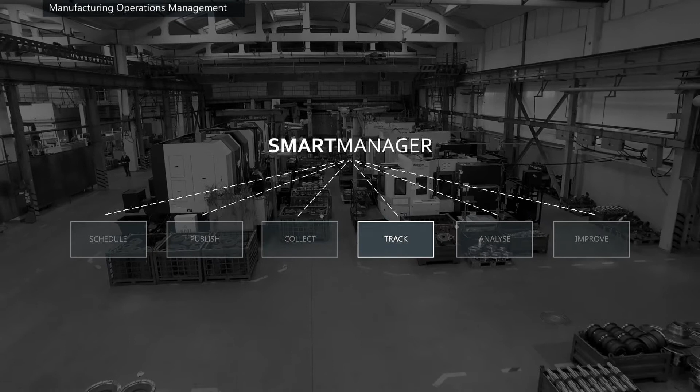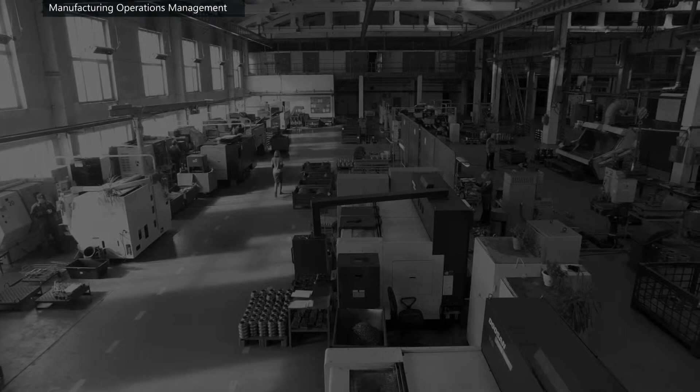Using latest technologies, the solution can effectively schedule, publish, collect, track, analyze, and help to improve human and machine execution of orders on the shop floor, resulting in faster delivery and lower production costs. In this video, we will show you how Smart Manager helps you measure your performance, increase your productivity, optimize your

operations, connect your machines, to revolutionize your factory. Measure performance, benchmarking human and machine performance to drive to world-class standards of operation within your organization.

Smart Manager provides key performance indicators, metrics, and the means of measurement to help you identify and drive loss out of your business, making you more competitive and more profitable.

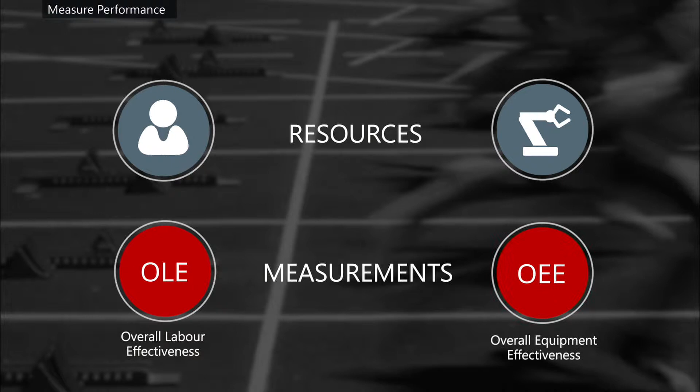As a manufacturer, you have two types of resources, people and machines. You pay a lot of money to have both of them, so you should monitor how well they're performing for you. For your employees, you need to measure their overall labor effectiveness. For your equipment, you need to measure the overall equipment effectiveness. These KPIs are supported by three metrics: availability, performance, and quality.

Let's take a look at a typical day for one of your employees. The day starts at 7 AM, they clock in and then grab a coffee. They make their way to a machine and start their first job. After a couple of productive hours of work, they stop for a break. They return from break and go back to the job they were running.

Then they stop for their lunch. In the afternoon, there is more of the same stop-start activities until ultimately they clock off. You need to be able to track all this activity to understand why they are not 100% productive for 100% of the time. This is known as their availability.

Then, you need to understand why they did not produce as many units as you thought they would during the time when they were productive. This is known as their performance. Finally, you need to keep a track on the quality of what they produce. These three measurements allow you to establish their labor effectiveness.

Now apply the same principles for all your employees and you begin to understand your overall labor effectiveness, or OLE. The average measurement of OLE in a manufacturing plant is only 40%. To be considered world-class, this should be 75% or above.

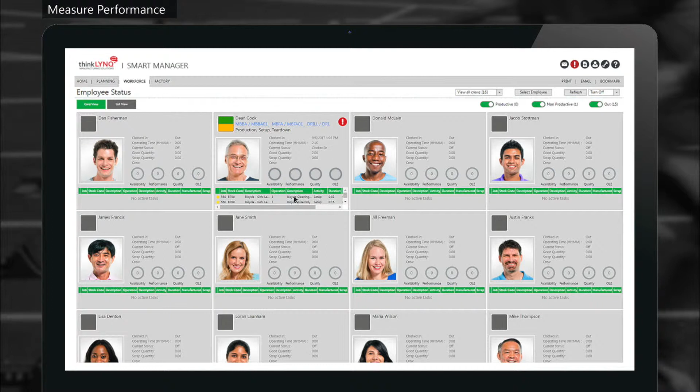Smart Manager supports the measurement and calculation of overall labor effectiveness. Data is captured using the workbench. Using the data captured, you are able to view the current status of all your employees, any issues they are having, and the jobs they are working on.

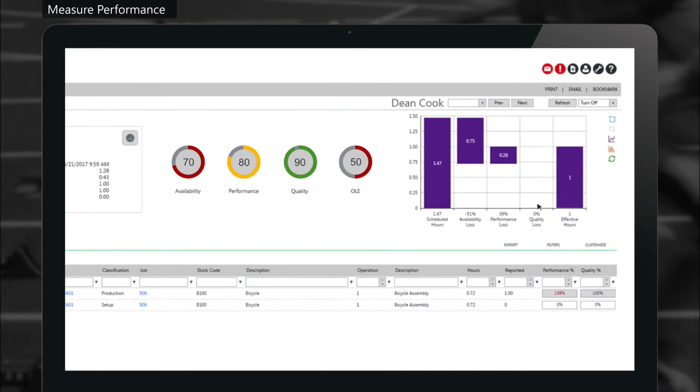Data is analysed in real time to provide availability, performance and quality metrics for each employee. Data captured for each employee is then aggregated to provide you with the overall labour effectiveness for your factory.

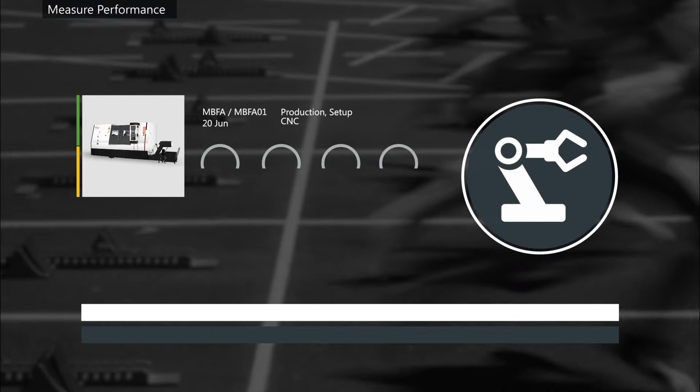Now let's take a look at a typical day for one of your machines. The machine is started at 7 AM, taking a few minutes to warm up before it can be set up for the first job. As the machine is not producing anything during this time, it is classed as non-productive, or downtime. The first job is run and produces a quantity, but some of the units produced have to be scrapped.

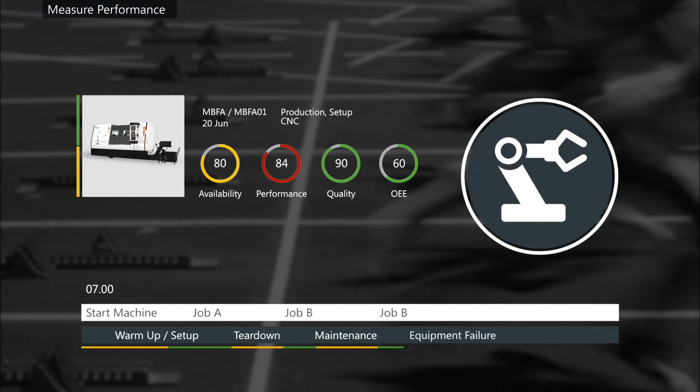When the job is finished, the machines need to be cleaned in preparation for a different job. The next job starts and then the engineer shows up to service the machine. During the rest of the day, there is more of the same stop-start activities, until ultimately the machine is switched off. Machines are the same as your employees, except probably a lot more expensive.

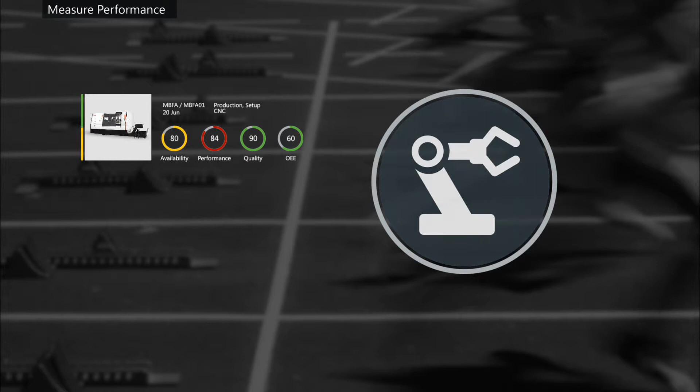You need to be able to track all this activity to understand why this costly asset was not 100% productive for 100% of the time. That's availability. You need to understand why it did not produce as many units as you thought during the time when it was productive. That's performance.

Finally, you need to keep a track of the quality of what is produced. By knowing all this, you can calculate its equipment effectiveness. Applying the same principles to all your equipment gives you visibility of your overall equipment effectiveness, or OEE. The average measurement of OEE in a manufacturing plant is only 60%. Today's world-class manufacturers operate at 85%.

Smart Manager supports the measurement and calculation of overall equipment effectiveness. Data is captured using the workbench.

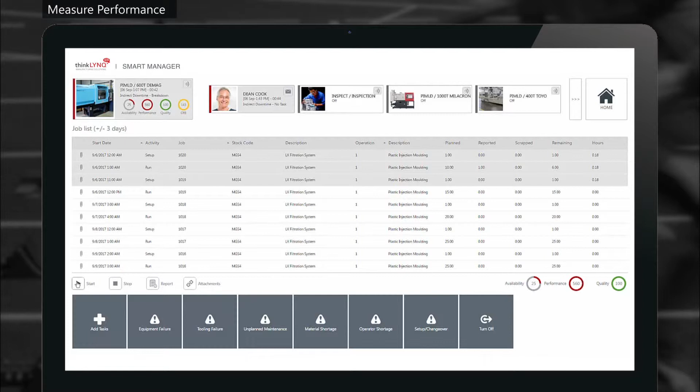There are two ways of capturing machine data. One way is for one of your employees to enter the time it was warming up, in setup, running, being cleaned, etc., and how many parts it produced, both good and bad, during this time. The other way is to automatically retrieve this data from the machine. We'll be talking about this more later in the video.

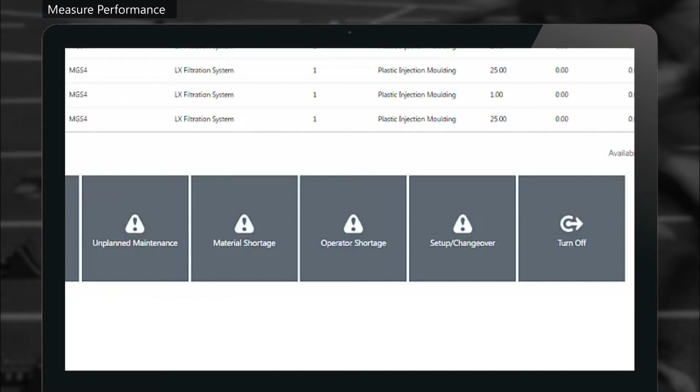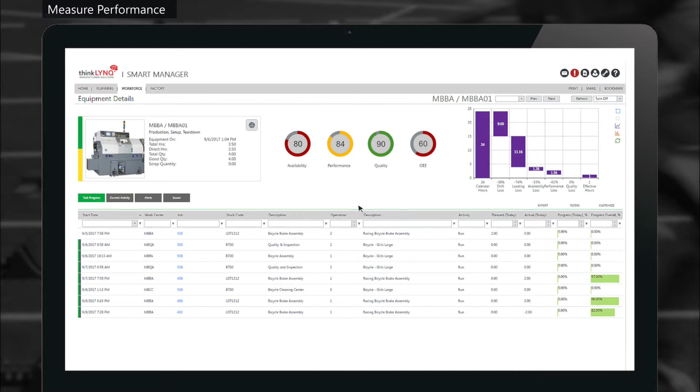Using the data captured, you can view the current status of all your equipment, any issues that have occurred, and the jobs they are running. Data is analysed in real time to provide availability, performance, and quality metrics for each machine or device. Data captured for each machine is then aggregated to provide you with overall equipment effectiveness for your factory.

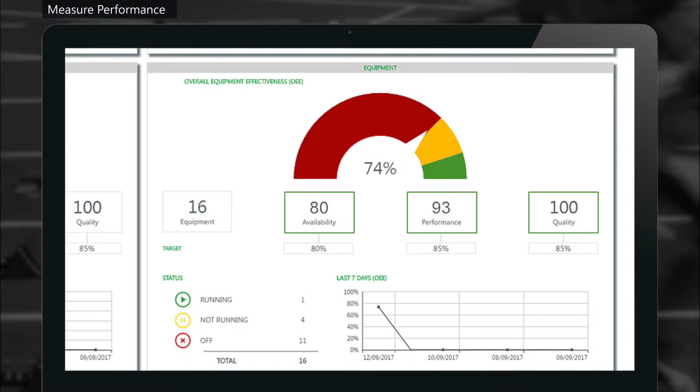TEEP is the ratio between actual effective time, in other words time spent producing only good product, compared with all the time available, calendar time. It is calculated by multiplying your percentage loading by your overall equipment effectiveness. When it comes to TEEP, a fourth metric is added: loading. Of the three KPIs, it is widely regarded as the most important manufacturing KPI due to the ability to significantly influence productivity through better planning and scheduling.

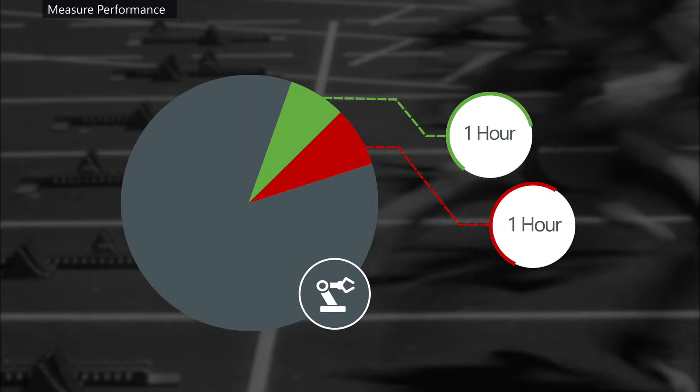For example, if you have 15 jobs for the same product, and each product needs 1 hour setup and 1 hour teardown, if you were to complete these on separate machines, you would create a total of 30 hours non-productive time from 15 setups and 15 teardowns, which is actually downtime. But, through better scheduling, you may be able to run these jobs back to back on the same machine and still meet your required delivery date. And if you did this, you would save yourself 28 hours, as you now only need 1 hour setup and 1 hour teardown after all jobs have been completed.

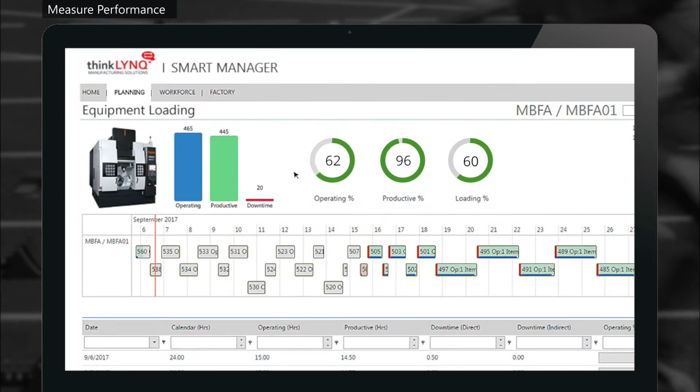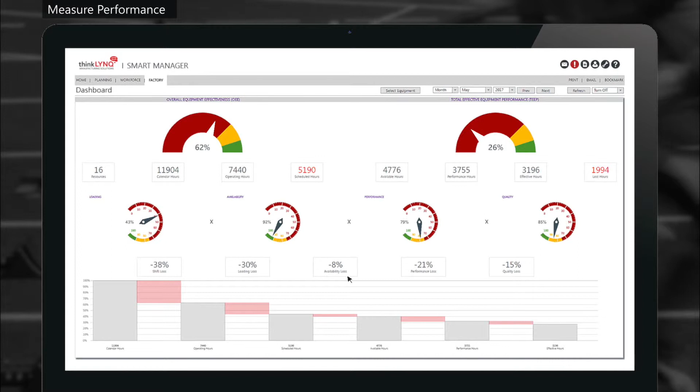Smart Manager supports the measurement and calculation of total effective equipment performance, as the solution incorporates scheduling. Loading metrics provided by the Visual APS are included in the mix for equipment. With this fourth metric added, you are able to see how your total effective equipment performance is calculated and can be viewed via the dashboards. To understand the detail, simply drill into the dashboards.

Increase productivity, understanding and minimizing loss within your business. With an understanding of how you are performing, you need to identify, classify and quantify where your losses are. Once you can do this, you can reduce loss, which will allow you to deliver faster and lower production costs. Eliminating loss provides true tangible value and return when you consider each lost hour from both a cost and profit-making perspective.

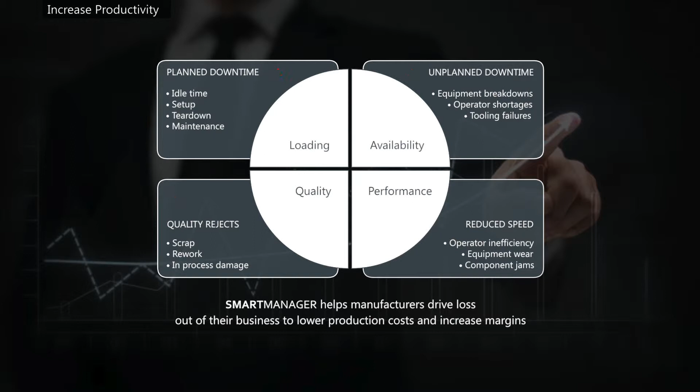In this example, we have taken a CNC machine and a typical 24-hour period. The machine only runs during shift time, and you work 2 10-hour shifts, so effectively 4 hours have already been lost. It is a financial decision as to whether or not your business would benefit from running for the full 24-hour period. After that is where it gets interesting.

The first loss is a loading loss. Consider the machine being left idle, requiring maintenance, being set up for a new job, or being cleaned at the end of the job. These are all times when your machine is not producing.

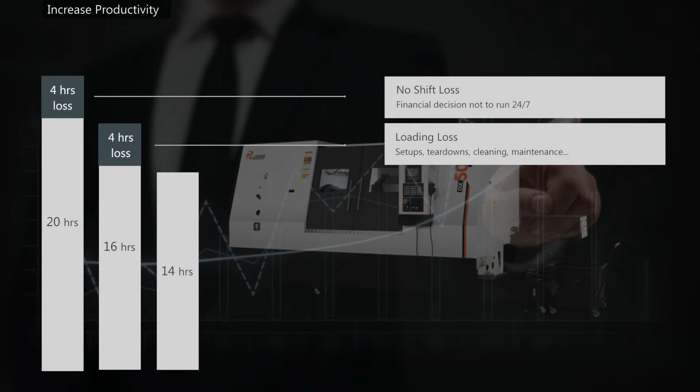Then, after you have created a plan that has minimized idle, maintenance and changeover time, you get hit by a dose of reality. The equipment breaks down, your operator is short of materials or documentation. We classify these types of things as an availability loss.

And now the job is running, but it's not running as quickly as you planned it to in your routing. This can be categorized as performance loss due to things like equipment wear and tear, or perhaps a new operator who has not been trained.

Finally, some parts are produced, but unfortunately not all of them pass your quality inspection, and they need to be scrapped or reworked. Unfortunately, you now have a quality loss. So you started with 24 hours and ended up with 10 hours being effective, i.e., these are the hours when you produce only good product. The goal is to minimize or preferably eliminate all these losses so that, if possible, every hour becomes an effective hour that produces good product.

There are a substantial amount of hours lost, and this example only considers one resource for one day.

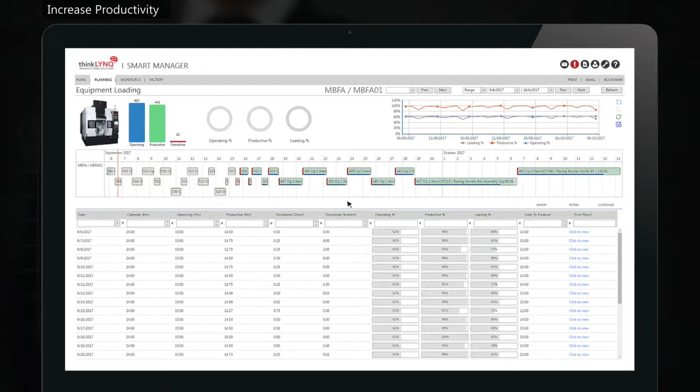You have 50 machines and there are 365 days in a year. Consider the total lost hours from both a cost and a margin perspective, and you begin to understand the financial importance here. The good news is that once you can identify, classify and quantify your losses, you can do something about them. Loading losses can be measured for each of your resources from the data provided by the APS.

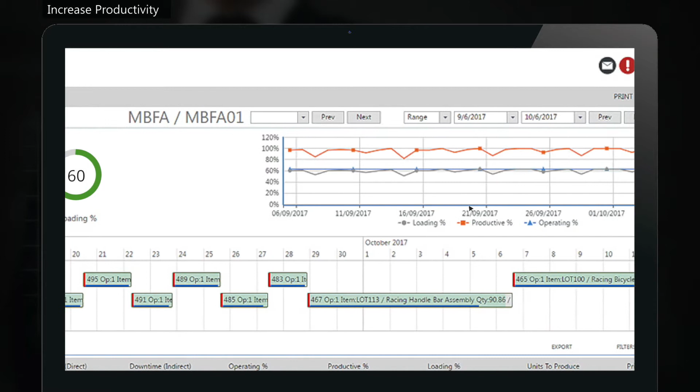The loading loss for each piece of equipment is then aggregated at a factory level so that you can understand your total lost hours as it relates to your available capacity.

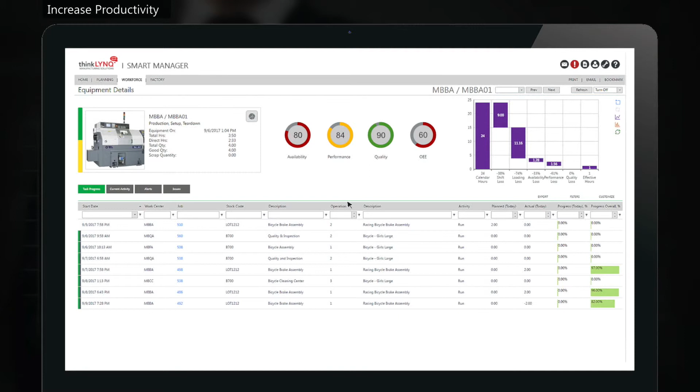Availability, performance and quality losses are measured using the workbench for both employees and equipment. Loss from each of your employees and equipment is then aggregated at factory level.

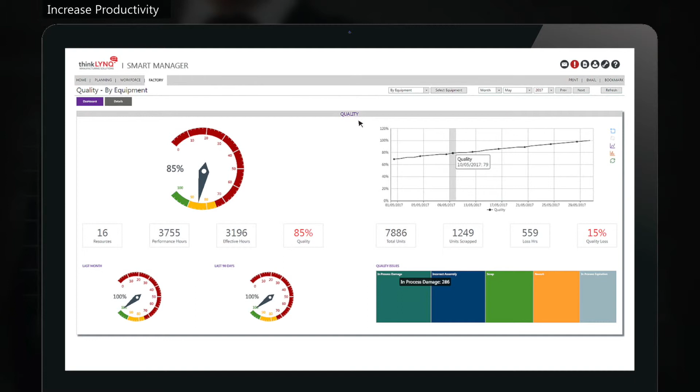Open the Loss Management dashboard to gain complete visibility of all your losses across the factory, and use powerful drill downs to get to the root cause to apply countermeasures.

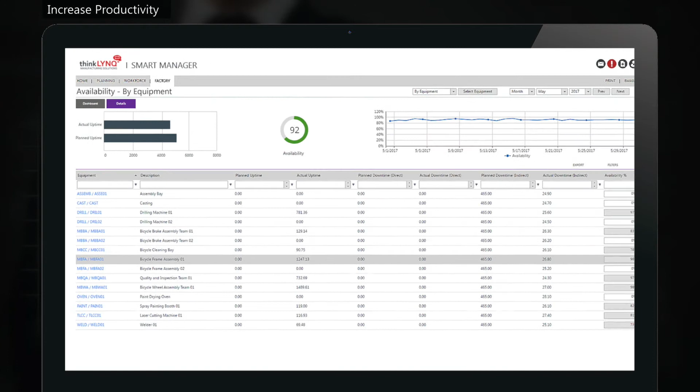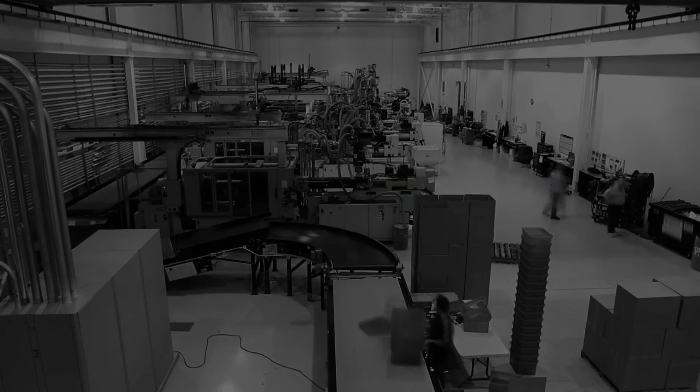Optimize operations by using a single solution to help you schedule, publish, collect, track, analyze, and improve. Smart Manager provides a fully integrated solution for the effective management and optimization of your manufacturing operations.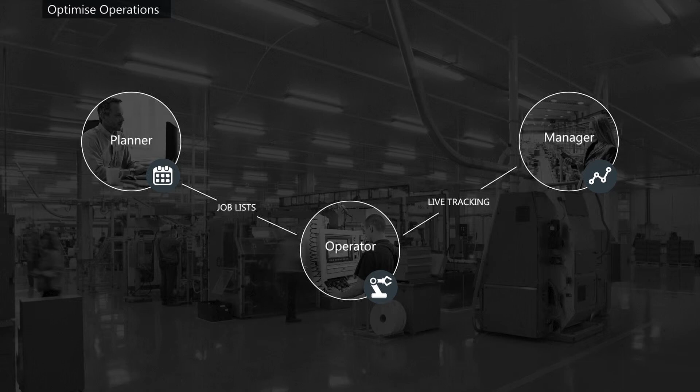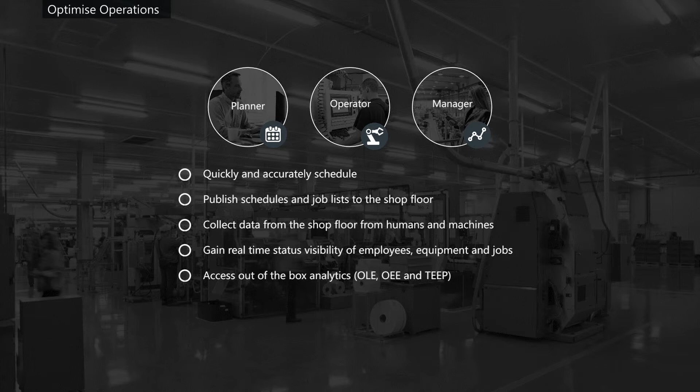Achieve world-class efficiencies from a single solution that provides the ability to quickly and accurately schedule, publish schedules and job lists to the shop floor, collect data from the shop floor from humans and machines, gain real-time visibility of employees, equipment and jobs, access out-of-the-box analytics, and drive continuous improvement with 6 Big Loss analytics, online documents and more.

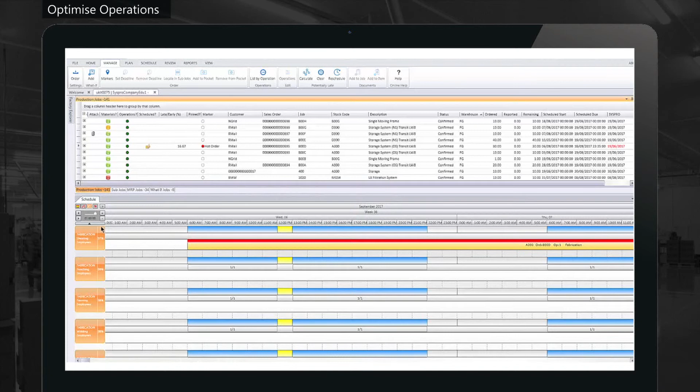Quickly and accurately schedule by dragging and dropping or auto-scheduling your orders and operations. Use the simple dashboards and views to understand your load and maximize order fulfillment.

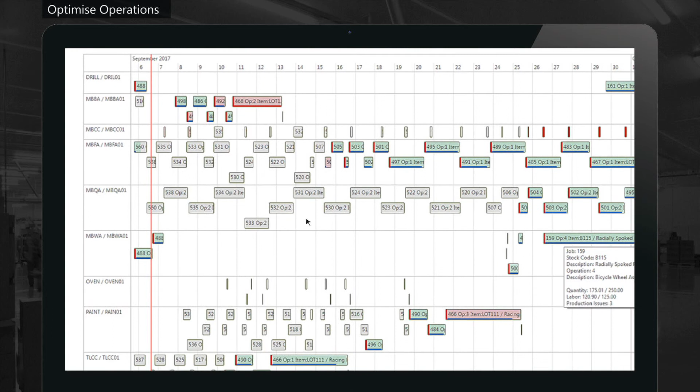Publish schedules to the shop floor that can be viewed on any device from anywhere. Provide your workforce with simple-to-use work lists that help drive efficiency and adherence to plan.

Collect data from the shop floor easily and accurately from your employees and machines. See how you are performing in real time and resolve issues before they become a problem.

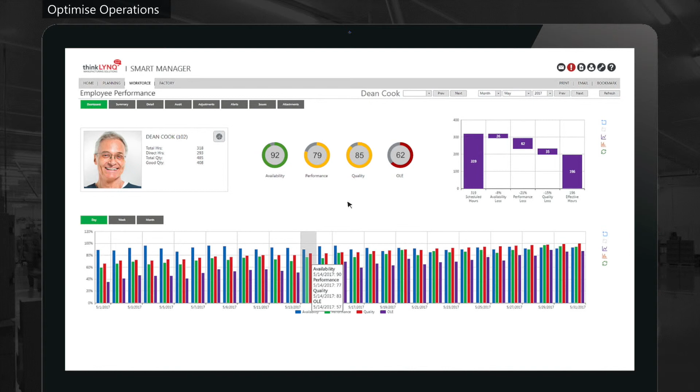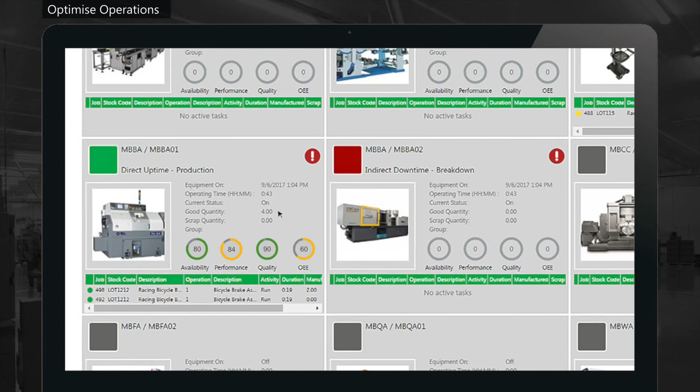Use employee and equipment status screens to effectively manage your workforce to maximize their productivity. Use job status reports to provide visibility of progress.

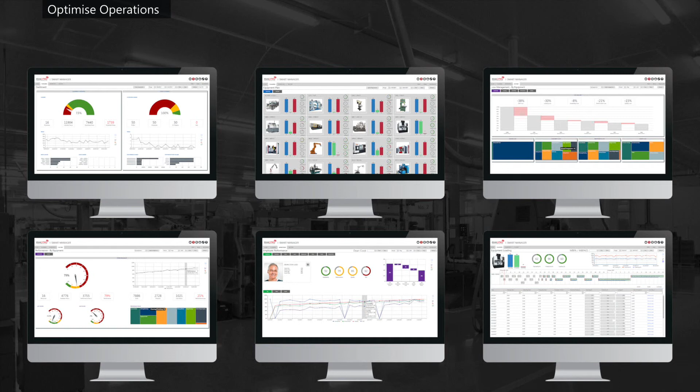Use powerful dashboards and management reports to drive your performance to world-class standards. Leverage 6 Big Loss analysis to understand where your losses are so that you can do something about them.

Drive continuous improvement by eliminating paper from the shop floor. Improve collaboration and communication with alerts and messaging.

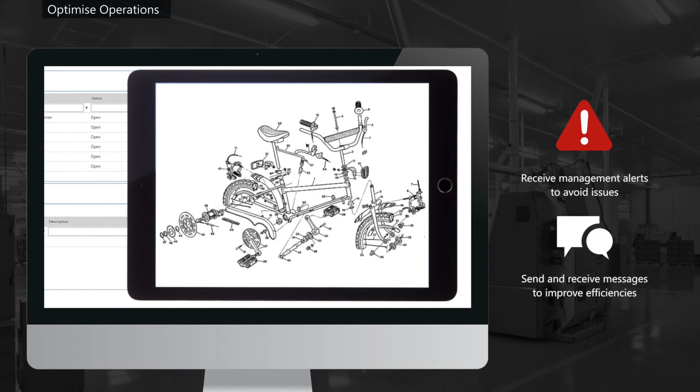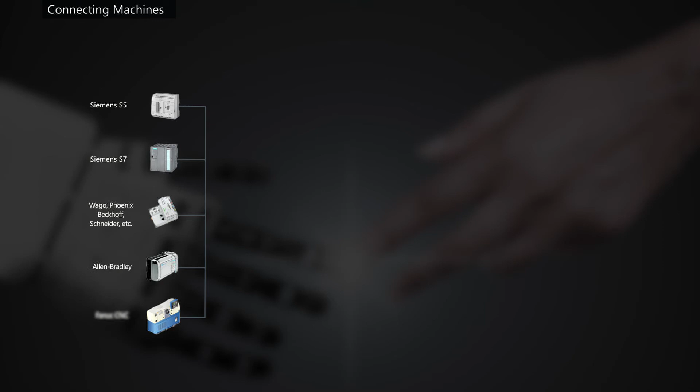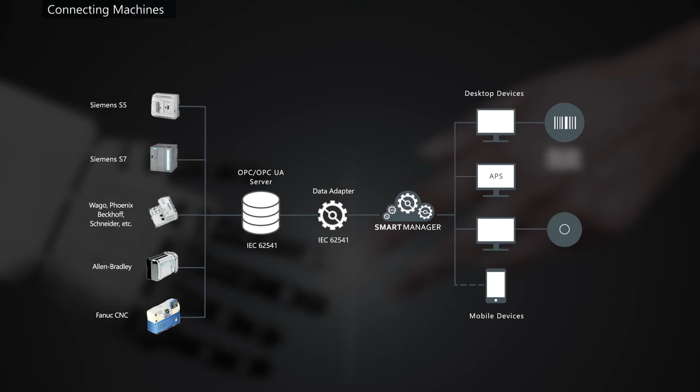Connecting machines, helping you take the first steps towards Industry 4.0 and digitization of your factory. Smart Manager provides the platform to digitize your factory by allowing you to connect your machines, measuring equipment, and other devices. With Smart Manager, you can automatically connect with machines in order to read data without manual inputs.

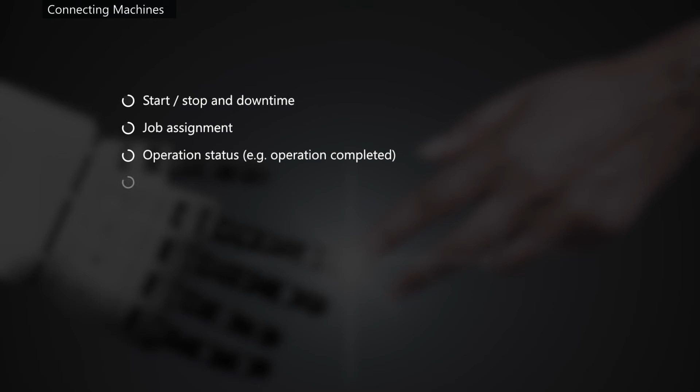Gain real-time visibility of start, stop and downtime, job assignment, operation status, machine status, parts count, component count, performance issues, custom values, for example, temperature, pressure, spindle speed, and more.

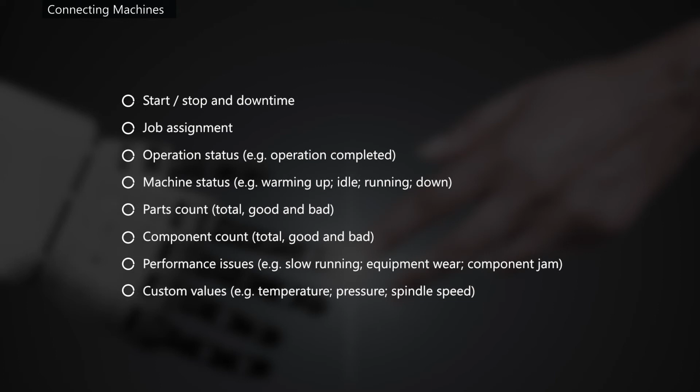Become part of the revolution to stay competitive by embracing the industrial Internet of Things and establishing your path toward Industry 4.0. Revolutionizing your factory to help you compete in today's market.

During this video, you have seen and heard how Smart Manager can help you measure your performance to drive toward world-class standards of operation, increase your productivity by minimizing loss within your business, optimize your operations by using a single solution to schedule, publish, collect, track, analyze, and improve, and connect your machines and other devices to help digitize your factory and take you toward Industry 4.0.

The solution has been formed around the globally recognized standard for manufacturing operations management, IEC 62264, providing the tools and analytics essential for effective manufacturing operations management to help you compete in today's market.

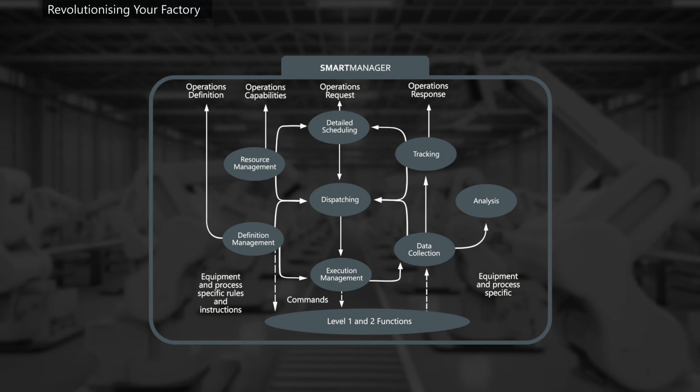Whether considering the investment from a strategic, financial, operational, or technological viewpoint, there is a significant return typically within a period of less than 6 months.

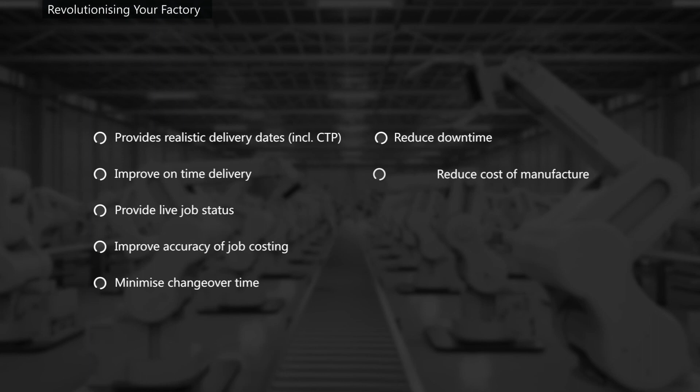Smart Manager helps manufacturers meet their objectives. It provides realistic delivery dates, improves on-time delivery, provides live job status, improves accuracy of job costing, minimizes changeover time, reduces downtime, reduces cost of manufacture, increases productive time of employees and equipment, and eliminates paper from the shop floor.